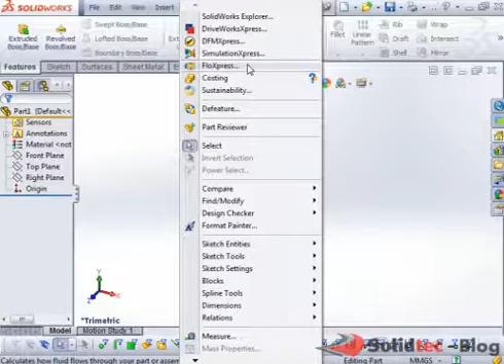The DriveWorksXpress tool allows us to configure a product based on rules, and we'll take a look at some examples. DFM is a product that allows us to do some design validation, so we can define rules and run our product against that rule, and we'll get a result out of that. SimulationXpress is a tool that allows us to run a linear static analysis on our part in order to find problem areas or areas where our part can fail. And FloXpress is a utility that allows us to create an analysis of fluid flow inside a single closed cavity. Let's take a look at our first example now.

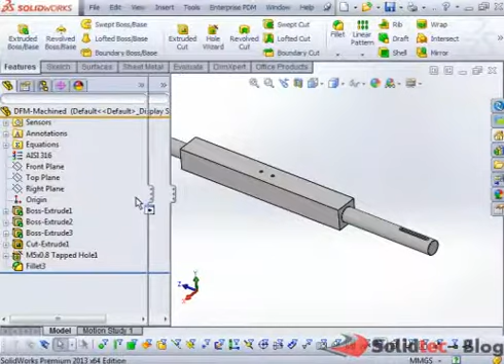First example will be for design for manufacture, and so we can analyze machine components as well as sheet metal components, amongst others. Let's take a look at an example of our machine component. Here we have a conveyor drive shaft. Now we're going to launch design for manufacture, and here it is. It's a wizard-based interface.

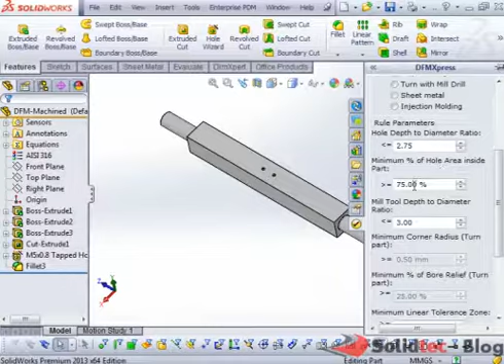Now we can access our settings menu directly from that button, and as you can see, we can define rules for mill and drill operations, manufacturing operations, turn with mill drill, sheet metal, and injection molding. It's as simple as defining a few criteria here. For example, hole depth to diameter ratio must be less than or equal to 2.75, or minimum percent of hole area inside part must be greater than or equal to 75%. And if you hover over any of these, you'll get a nice description of what exactly it means.

So let's see how this works. Once you have your rules defined, we're simply going to click on run, and it now runs, and it's going to give us some results here. So in this part, we have one rule that has failed, and the remaining 9 rules have passed.

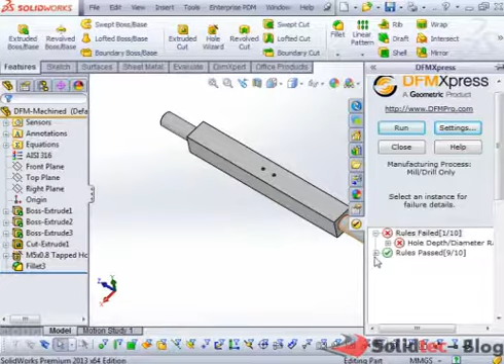So we can now see, simply clicking on it, it highlights the problem area. The depth to diameter ratio is 7.14, whereas the maximum recommended ratio is 2.75. So basically this is telling us that based on the diameter of this hole, this depth is too deep. So we need to address that.

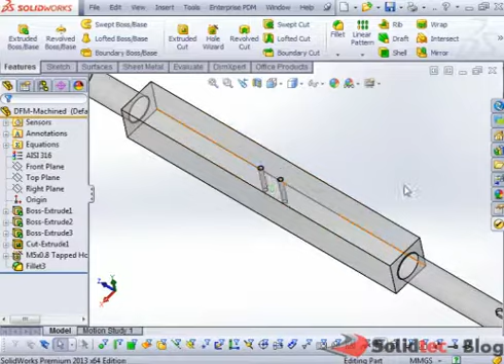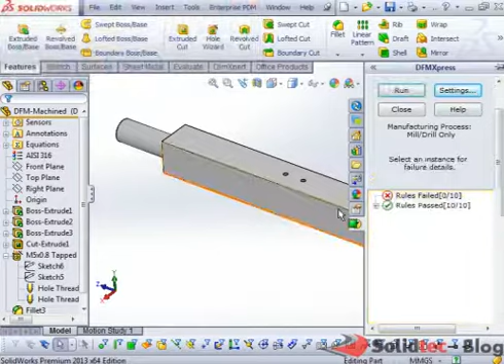So once we address that, we can run this again, and it will pass. Let's just modify that quickly. Okay, so we now have a shallower hole, and let's run that one more time. We now see that rules failed 0, rules passed all 10 of 10 rules passed. So a nice way of doing some design validation.

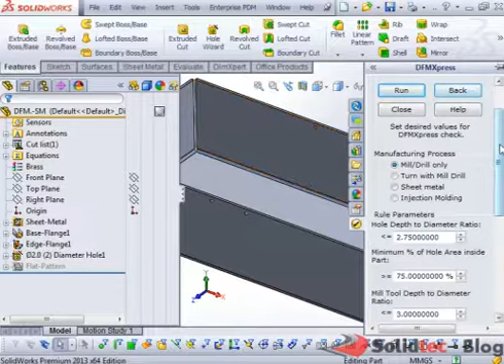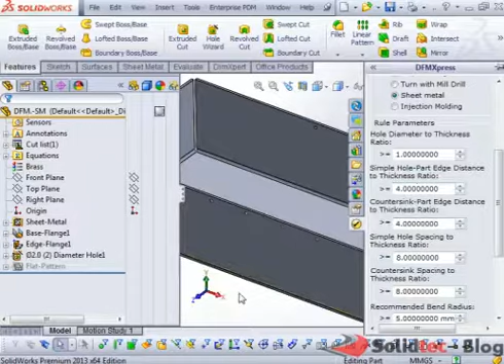Let's take a look at our next example. Again, staying in the DFM product line, we're going to look at a sheet metal component. Let's go into the settings. This time we're going to look at sheet metal, and here we have some similar settings. Hole diameter thickness ratio must be greater than or equal to 1. Simple hole part edge distance to thickness ratio must be greater than or equal to 4. And once again, you get the nice tool tip, so you can hover over that and see what exactly they mean. So let's run our analysis on this part now.

So it's checking the part. Now we have our failures here. 5 of 7 rules passed, 2 of 7 rules failed. So we can take a look at each one of these. What do we have here? The ratio of the minimum distance between the edge of a simple hole and the edge of the part to the sheet thickness is 1.3.

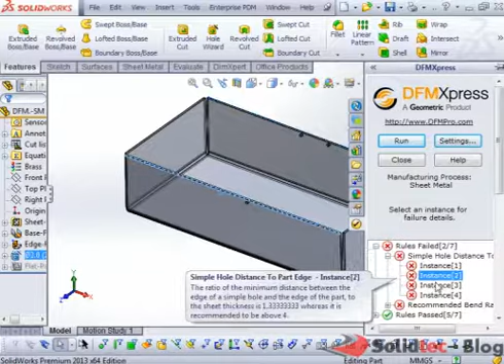So really what this is telling us is that these holes are too close to the edge. There are 4 instances of those holes, and we have each of those listed here. And the next error we have is that the recommended bend radius, the radius of this bend, is 1.5 millimeter, whereas the recommended bend radius should be greater than or equal to 5. So we have an issue with our bend radius.

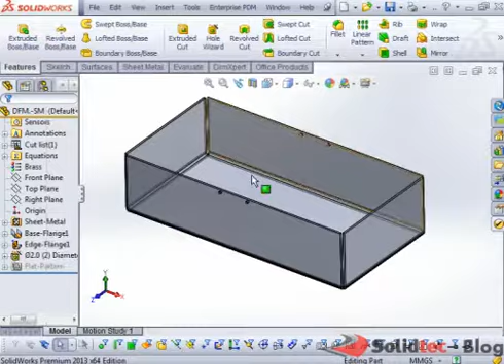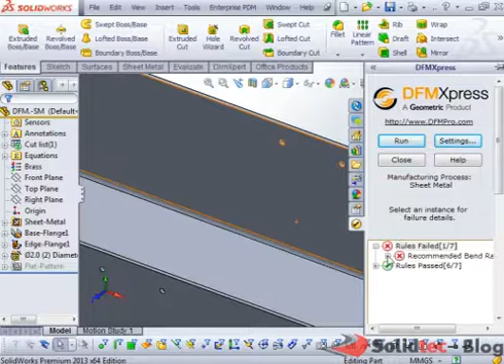So let's just correct one of these. I'll address this issue here. We're going to push that out a little bit deeper into the part. Now let's run our utility again. And now we have only the bend radius rule failing. So that passes the rule, and that satisfies our manufacturing criteria.

Okay, let's take a look at the next example. Next, we'll take a look at DriveWorksXpress. We can launch DriveWorks directly from the Tools menu. We're simply going to run a model, and I've already predefined this user interface right here.

I can say, give me my last used values. So my last project number was 14. The next number I'm going to use is 15. And we're going to say, give me an application for standard duty. So we have some pull-down menus here. An environment that this component is going to be used in is going to be dry. The gear type we can select is maybe one of these gears from the list of manufacturers that we use. This is the belt width, and the shaft type that we're going to produce. Let's say we're going to produce a drive shaft.

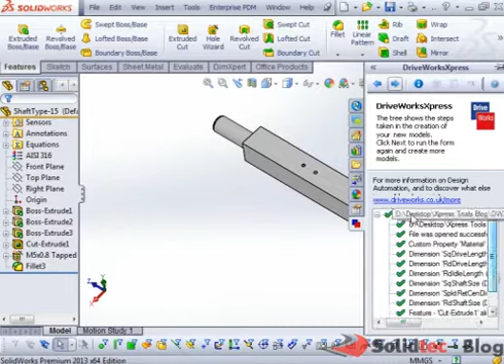I'm going to click the Create button. We get our document created really quickly, and we get a nice rule or report based on all of our rules. So we can see that all of this information was driven into the part successfully. So here we have our drive shaft.

Let's take a look at another example. Again, we'll run this, just using last use values. This time we're going to bump the project number to 16, and let's go with a heavy duty application, with a wet environment as well. So when the environment is wet, we may wish to switch to a stainless steel motor or gear. And let's switch the belt to 400, and maybe we want an idle shaft this time. So we'll create that.

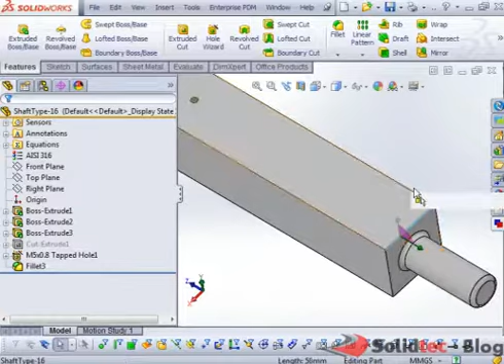And here you can see we now have our idle shaft. The heavy duty application has given it a larger square cross-section area. And we've also driven in some custom value information, for example material. Now this is simply just a custom property - it's not actually driving the material, but it's simply driven the material custom property information into this document.

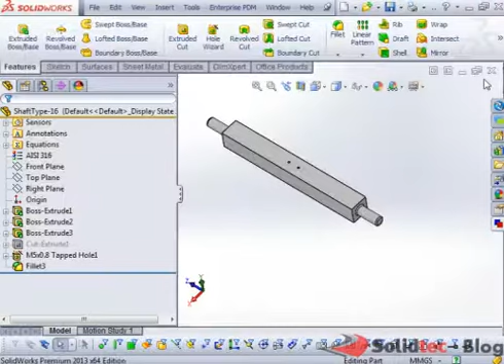So that's a little bit about DriveWorks. Let's take a look at the next example.

The next example we're going to take a look at is FloXpress. Now here I have a sample power supply, and it's got a fan inlet in this area here, and another outlet exposed to the environment. So we launch our FloXpress via the Tools menu.

I've already predefined the analysis here, so I'll just go back into these parameters to show you. We have the ability to analyze water or air, and we can define the flow based on inlet pressure, volume flow rate, or mass flow rate. Here I've defined it based on pressure with a value of 102 kilopascals. And the outlet is basically this area here, simply exposed to the environment, so we just have environment pressure. It's basically a wizard-based interface, so we're pretty much done defining our parameters, and we're going to go ahead and run the analysis now.

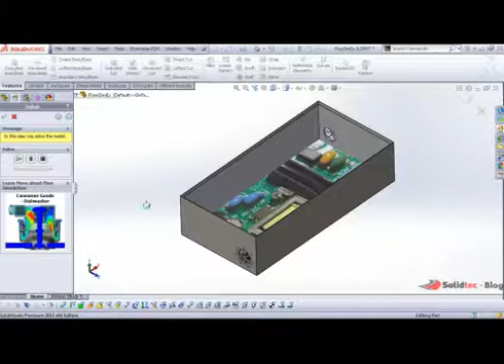And so here it is, the analysis is done. We get a nice little legend here based on the trajectories and the velocity, and we also see a graphical interface, so I can animate this. Here we see the fan blowing air, and this is in the green region here. The trajectories are slightly faster, and as it gets closer and closer to the outlet, the flow slows down. So we can use this technique to analyze whether our component cooling in our design is adequate or not.

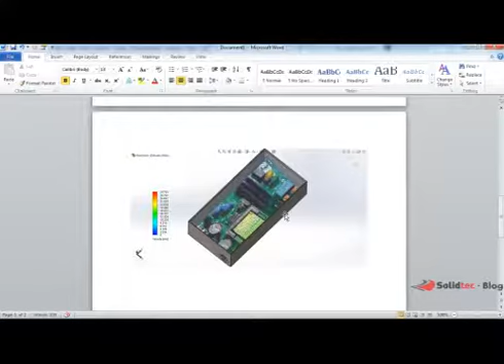I'll just stop this animation here, and then we have the ability to generate a report. So the report is generated in a Word document, and you get all of your parameters, the model that we're running, the environment input information, and the result information. And at the end of that is a nice image, including the legend. So that's FloXpress. Close this.

And the next one is Simulation Express. As I mentioned, SimulationXpress is a tool that allows us to run a linear static analysis in order to find failure points in our model.

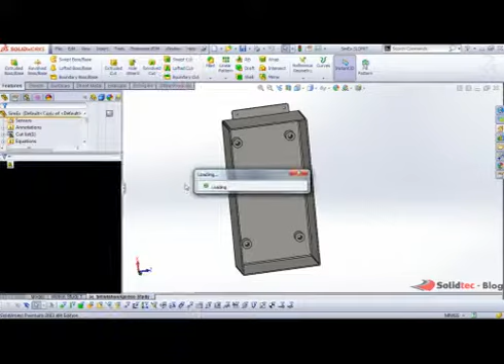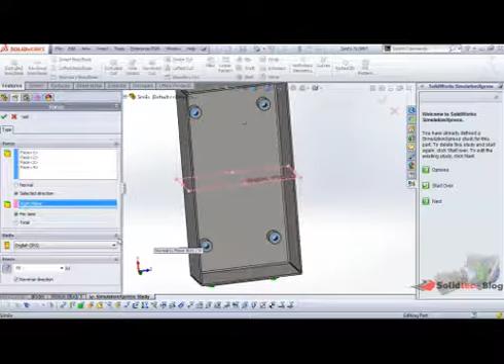Now again, I have run this ahead of time, so let's just take a look at some of the input here. I've defined the fixtures in my model - these holes here and also at the bottom. We've also defined the loading criteria, applied to these standoffs, at 90 pounds. So we might have some really heavy transformers in this box.

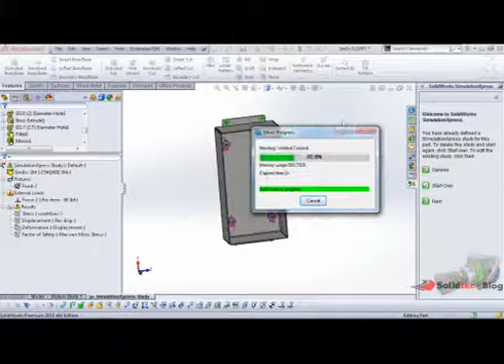Once we're done defining our fixtures and loading criteria, we can simply run this analysis and it'll mesh - it'll just take a couple of seconds to mesh this. And once it's all done, we get a nice animation.

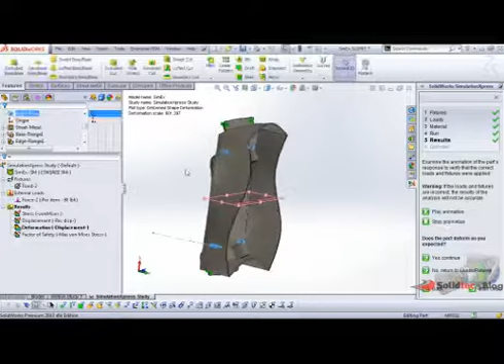Now obviously this is a highly exaggerated scale - this deformation would not be at a real one-to-one scale. So we can stop this animation, and really the thing we're interested in here is the stress plot. We can see that our selected material has a yield strength of just under 30,000 psi, and our maximum in this model is 16,000, and our minimum is 8. So we can see that our model is certainly adequate for the design criteria here.

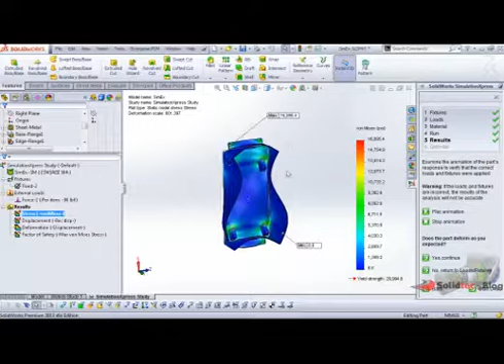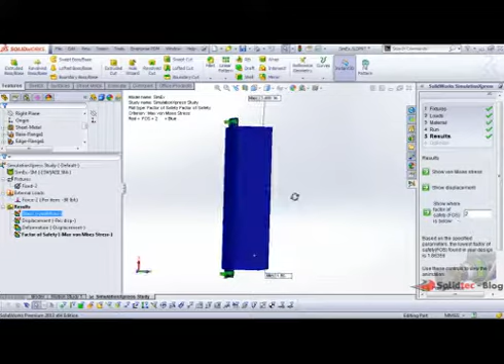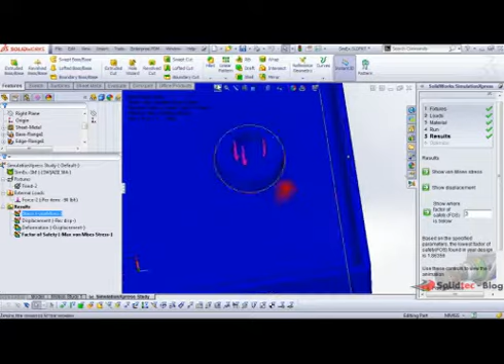We can also look at the results based on a factor of safety plot. At a factor of safety of 1, we can see our entire model is in the blue region, which means it's adequate, and I can push the factor of safety up to 2, and we can still see everything is blue, which is again good. As soon as I start approaching a factor of safety of 3, we begin to see some red areas in our model. So we have adequately designed this and also included a bit of a buffer in our design to ensure that our part will not fail out in the field.

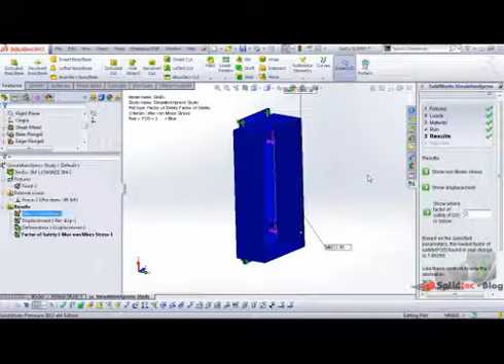So that's a little bit on the Express tools in SolidWorks. Again, it's available in every license of SolidWorks, and there are limitations. These are really just introductory tools into the full-blown part, and if you find that you do need more features available, don't hesitate to contact your local Solidtec reseller to find out more about these tools. Thank you.